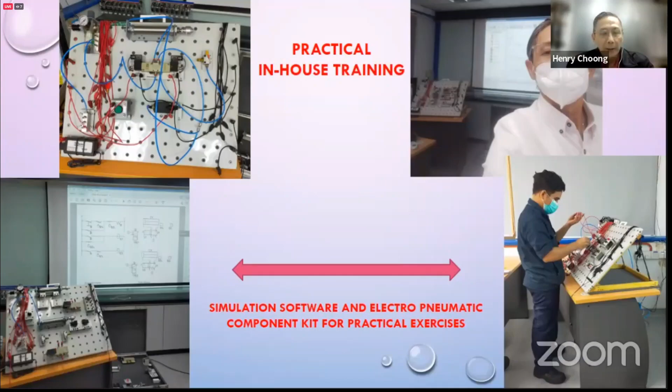In our pneumatic automation, our entry level is actually zero. We start from the very basic principles to the very practical techniques. We start with the basic principles, which are the theories, and after that we do the practical exercises together with circuit simulation for further and easier understanding.

What is the importance of education in pneumatics? We provide innovative, high-quality solutions to our clients and participants. Our training is dedicated entirely to educating employees, offering continuously updated courses, including practical tools for continuous and effective learning, using the latest state-of-the-art tools for easy understanding. That's the simulation software we have shown you just now.

Knowledge is our greatest asset. When it comes together with imagination and creativity, ideas are born, which then stimulate progress and growth. The rapid evolution of technology in industries greatly demands component manufacturers and educators provide solutions for their industrial applications, in particular automation processes within each sector, with pneumatics representing one of the most common technologies, offering adaptable and high-performance solutions.

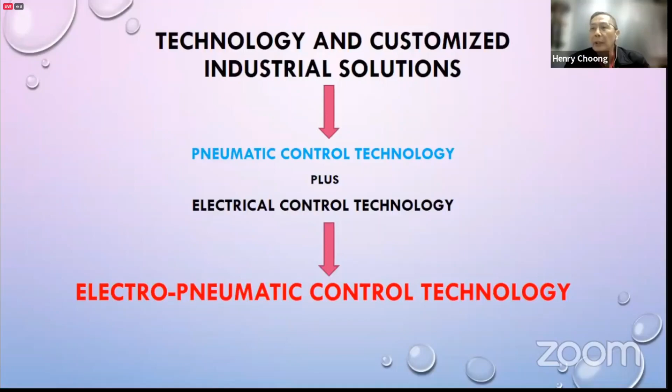Control elements are also very important. Their function is to control the air and the cylinders, the actuators. Then we talk about the control of double acting cylinders. We also learn how to control the flow of the air in order to control the speed of the cylinder, and also the quick exhaust valve and the servo-controlled 3-port 2-position valve, which is a newer technology compared to the older version using direct actuation. Then we talk about seals and the maintenance of pneumatic components.

We will also do basic pneumatic circuits: understanding and comprehension, drawing of circuits, and reading of pneumatic circuits as well.

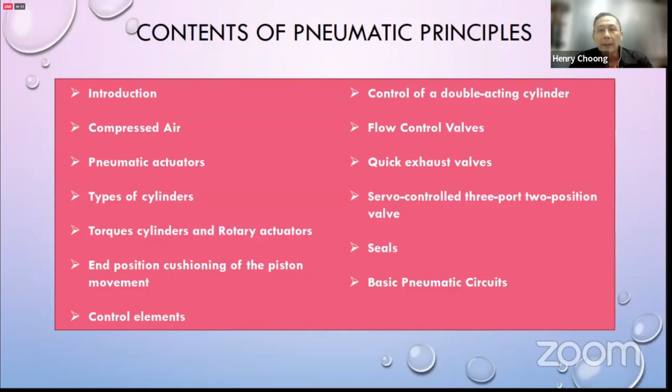Control of single acting cylinders using pilot circuit. Pilot circuit here is the electrical pilot circuit, right? Using normally open or normally closed. So all these applications go into the double acting cylinder and single acting cylinder. The control part is the electrical, which we have done earlier during the logic function, right?

As we go along, we will control double acting cylinder, various types of control using 3-way valve. We can also control it unistable, or monostable in other words, or bistable, using unistable valve or bistable valve. Of course, the 3-way valve is used to control single acting cylinder due to its one outlet, and double acting cylinders are controlled by 5-port 2-position valve or 5-way valve.

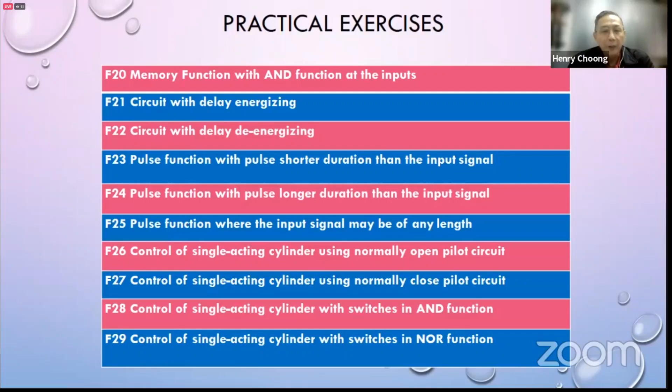Okay, so here again we do the exercises. Automatic cycle equipped with start-stop switching, whereby you can control the sequence of the flow from one cylinder, and later on we can have up to 2 cylinders. As you can see on exercise F41, cycle using 2 double acting cylinders using 5-way unistable valve. And 42, doing the same exercise using 2 double acting cylinders, but this time using 5-way bistable valve.

So the unistable valve in electrical control is actually the single solenoid valve, and the bistable valve is actually the double solenoid valve. So we can use single solenoid valve or double solenoid valve to control both double acting cylinders together, either way, depending on the situation and also the machine developer.

Some machine developers use unistable valve or single solenoid valve, yet they can still control the sequence of the cylinders. And others will use bistable valve or double solenoid valve to control the similar circuit diagram. All this will be shown and taught during the training session. And of course, the last exercise is a cycle using 2 double acting cylinders with 2 different programs, meaning that you can switch over from one program to the other.

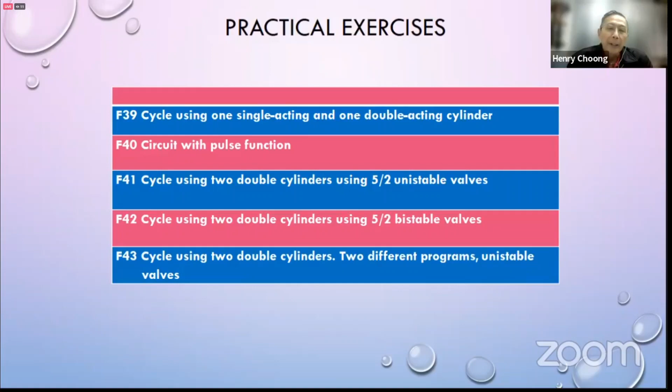Okay, so here will be the subject matter, just to illustrate a little bit what we do during our theory session. This is very important, to understand the fundamentals and basics of pneumatics before we can do the exercises. Without this basic knowledge, it's very difficult, if not impossible, to do the practical exercises without understanding the fundamentals of pneumatics.

Okay, the origin of pneumatics: as I mentioned earlier, the word pneuma originated from Greek and it means air or wind. It was documented by Heron of Alexandria in 60 CE. Heron was an inventor, a mathematician, a physicist, and the author of books in mathematics, physics, and mechanics.

So this is the person without whom there would be no pneumatics today. He is the one who invented the idea that compressed air would be used in control systems, or rather in automation.

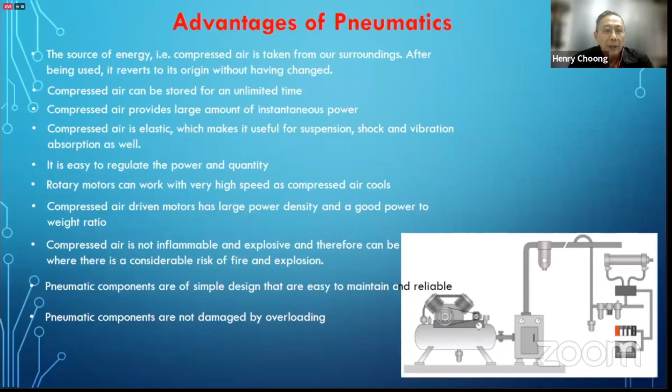So here we talk about the movement of the cylinder, right? Instead of talking about the cylinder extending or retracting, which doesn't account for whether the cylinder is held vertically or horizontally, we use the terms plus and minus. So we have the plus chamber and the minus chamber.

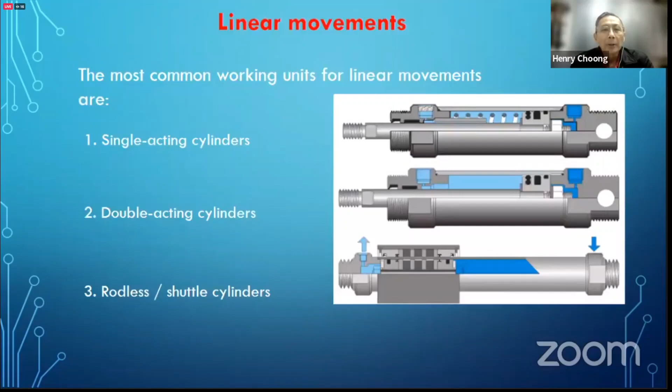If you supply air into the plus chamber, the piston will move to the plus, so we have a plus movement, and eventually it will end in the plus position. If you supply compressed air into the minus chamber, on the other hand, the piston has a minus movement and eventually reaches the minus position. So using these two words, plus and minus, it doesn't matter whether the cylinder is vertically or horizontally mounted.

Then we have the single acting cylinder. As you can see from the picture, there's a spring. The spring can be in the minus chamber or in the plus chamber, depending on the application. Okay.

So here we use a control valve, a 3-port 2-position valve, right? The 3-port 2-position valve has only one air outlet, which is connected to the supply inlet of the single acting cylinder. So when the valve is in the exhaust position, the spring will push the piston back to the minus position.

For a double acting cylinder, there will be no spring in the cylinder chamber, right? So meaning that when the cylinder moves to the plus position, it will remain there even though the air pressure has been removed. Likewise, to move it back to the minus position, you have to supply air pressure into the minus chamber.

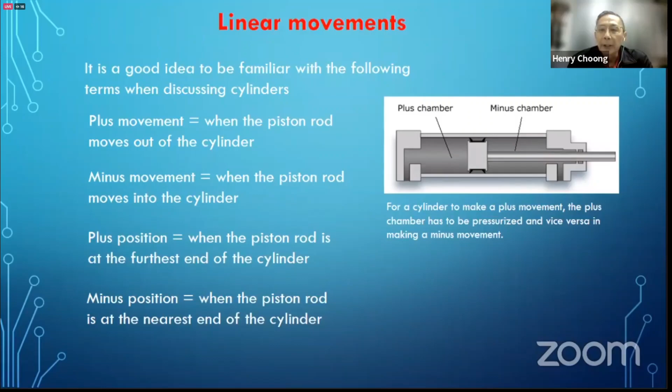One is magnetically connected, meaning that between the barrel and the shutter there's no connection at all. There's no opening on the barrel, right? So the magnet in the piston will pull the shutter from one end to the other end when compressed air is supplied to the port of the cylinder. Hence, it will move left to right, but without any connectivity between the piston and the shutter.

Okay, but the disadvantage of this is that it cannot carry too heavy a load, because if your load is too heavy, the magnet is not strong enough. So even though the piston moves from one end to the other, the shutter will remain in the same position.

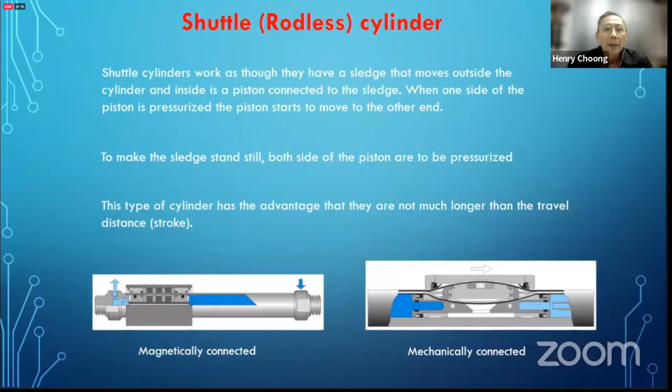Then we have the electrically activated valve, actuated by an electrical signal, usually 24-volt DC for the industries, and especially for PLC output, 24-volt to control the solenoid, turning it on and off. And also we can have pneumatic activation control of the valve. So basically there are 4 types of actuation: manual, mechanical, electrical, and pneumatic.

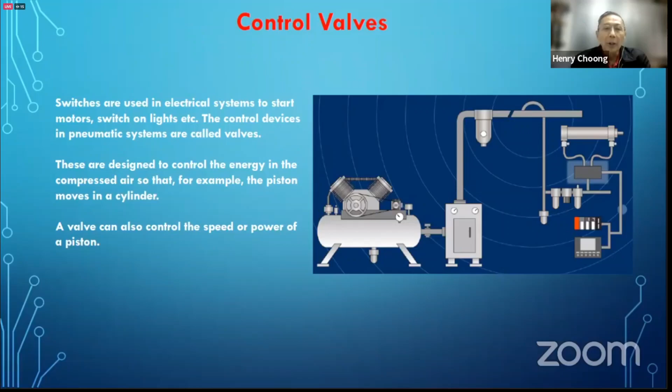And the control port always has 2 digits. Why is it 12? It's not called 12, it's called 1-2. Port 1-2 means that if you supply air into port 1-2, the valve is open between port 1 and port 2. If you supply air pressure into control port 1-4, it will move the spool in such a way that supply air in port number 1 will be connected to port number 4. Okay, so it's very meaningful and very easy to understand. And all this will be taught during the training as well.

Then we also have pneumatic logic. Besides the electrical logic that we have seen earlier in the electro-pneumatic, if we are using a pure pneumatic logic circuit diagram, there are also pneumatic logic such as AND, OR and NOT.

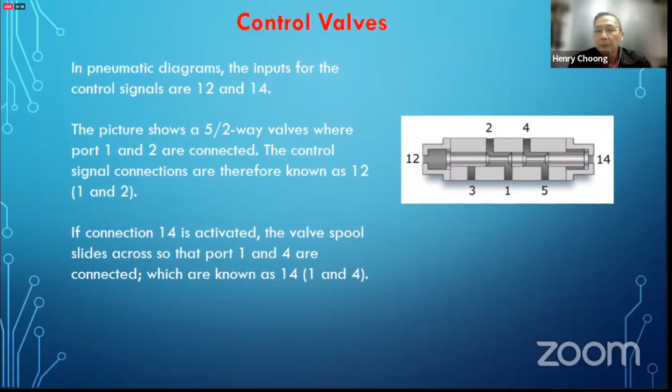Okay, so we will start here with the common valve, that is the directional control valve. A directional control valve consists of valve housing and moving valve spool, as you can see from the picture, right? The valve body and then the spool which directs the flow of the air. The design allows the air to pass through the ports of the valve, right? You can either direct the air through one of the ports or redirect it to the other.

So it is also possible to totally block the air in some instances. So you can have a position whereby port number 1 is closed totally. Okay, depending on your application, then we can do a selection of type of valve.

Right. So here is an example of a 5/2-way valve with the port numbers marked on it. As you can see, all valves, regardless of brand, are similar: the odd numbers and even numbers are opposite each other. Okay. So in this case, there are 5 ports, right? So the even numbers are on one side, and the odd numbers on the other side, 3, 1,

and 5. So 1 being the pressure supply port and the exhaust ports on both sides of it, 3 and 5. The outlet ports are always port number 2 and port number 4. And the numbers vary from manufacturer to manufacturer, meaning that 2 and 4 can be interchanged, provided opposite 2 is always port number 3, because you exhaust the air from 2 to 3. And opposite 4 is always port number 5, because the exhaust air from port number 4 always goes to number 5.

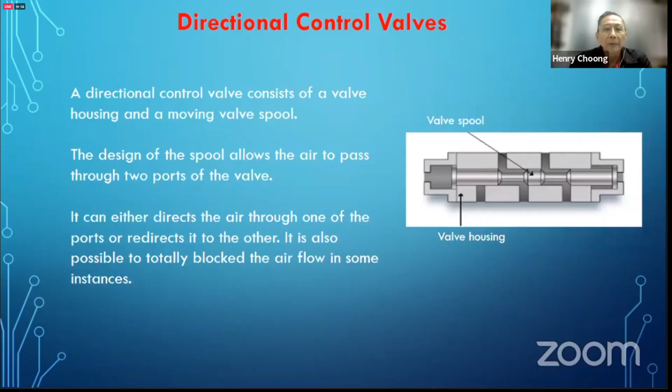We have also looked at other valves, among these flow control valves that are used to throttle the amount of airflow passing through them. Pressure regulators are used to regulate the pressure needed at the outlet to maintain a constant pressure and power. Because remember, force equals pressure times area. So if we have a reduced supply pressure, the force of the cylinder or actuator will also be reduced. If the pressure is too high, the force at the output of the actuator will also be increased. So this is very, very important.

Control of valves is now most commonly achieved by using electrical signals. Other methods of controlling or actuating valves are manual, mechanical, magnetic, or using compressed air. So this we have already covered; this is just a summary of it.